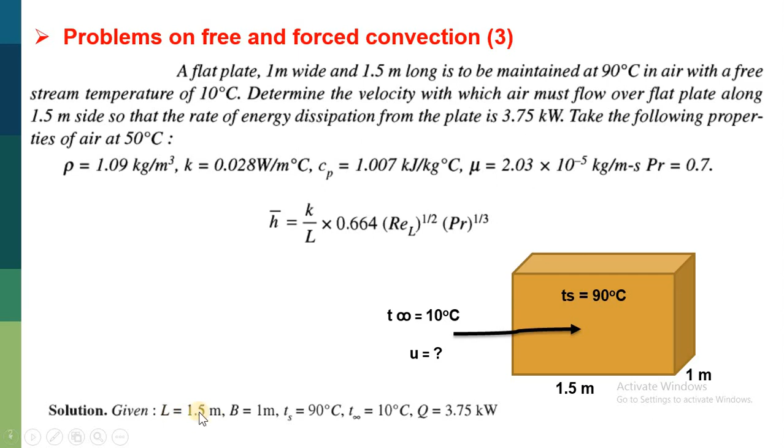And in each problem the relation for H, that is the convective heat transfer coefficient, is given. And once again I repeat, if there is a need to calculate the value of U, or if the value of U is given, the problem definitely belongs to forced convection, or if in this relation the Reynolds number is given, it means the problem directly belongs to forced convection. I have taken this data from the problem. Then let's solve the problem.

We have to calculate the free stream velocity. We know that according to Newton's law of cooling, Q is equal to HA delta T. So from this we can calculate the value of U. Before we begin, we calculate H, the convective heat transfer coefficient, and for this the relation is given in terms of K divided by L, Reynolds number and Prandtl number. K is directly taken from the table, L, the length, is 1.5, and the Prandtl number is given as 0.7.

And we know the formula for Reynolds number: when mu is given the formula is different, and when nu is given the formula is different. Here mu, the viscosity, is given, so we have to use the formula rho L u upon mu; if nu, the kinematic viscosity, is given, the formula will be L u upon nu. Keep this in mind. From this we can calculate the value of H, but here U is unknown. So the value of H becomes 3.123 into root U. Since U is unknown, we cannot determine the exact value of H.

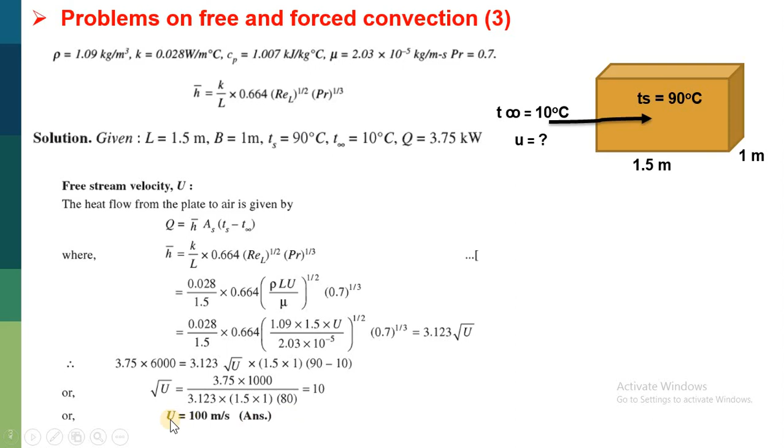But in this problem Q is given, the area A is given as 1.5 into 1, the surface temperature is given, and the infinity temperature, that is the free stream temperature, is given. By this relation you can calculate the value of U as 100 meters per second. This is the first problem where we have calculated the free stream velocity. Then we will go to the next problem.

A hot plate of 1 meter by 0.5 meter at 130 degrees centigrade is kept vertically in still air at 20 degrees centigrade. So the dimensions of the plate are given, and 130 degrees is the surface temperature of the plate. Here Tp is given, or we can write Ts, and the atmospheric temperature Ta is given, so you can take T infinity as 20 degrees centigrade. We have to calculate the heat transfer coefficient H and the initial rate of cooling. In this problem the initial velocity of air is not given, meaning u is not important. So in this case the problem belongs to free convection, keep in mind.

Also you see here, assume the 0.5 meter side is vertical and that the heat transfer coefficient calculated above remains constant, and convection takes place from both sides of the plate. So in this problem also keep in mind heat transfer is taking place from both sides. And in this equation you can see the Nusselt number is calculated from Gr and Pr. Pr means Prandtl number, Gr means Grashof number. Keep in mind, whenever there is a Grashof number, the problem directly belongs to free convection.

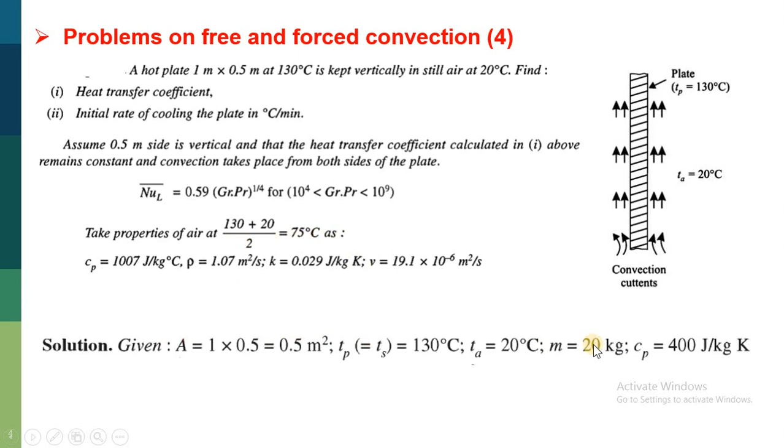Then properties of the air are taken in similar fashion. 130 degrees, the temperature of the plate, plus 20 degrees, the free stream temperature, divided by 2 gives 75 degrees centigrade. If this data is not given in the examination, you have to use the table and list down the properties of air at 75 degrees centigrade, and this data is directly given in the problem. So let's solve the problem.

So first of all we have to calculate the Prandtl number. If you have the value of Prandtl number directly given, then it is okay. If it is not given, we have to calculate it by mu Cp upon K. Then we have to know the formula of Grashof's number: L cube g beta into bracket Ts minus T infinity divided by nu square. Nu is the kinematic viscosity, and putting these values you will get the value of Grashof's number.

Then we have to take the product of Grashof's number into Prandtl number and put this product into the Nusselt number relation, so we will get the value of Nusselt number. And finally you know that Nusselt number is equal to HL upon K, and from this formula you can calculate the value of H, that is 5.66 watts per meter square degree centigrade.

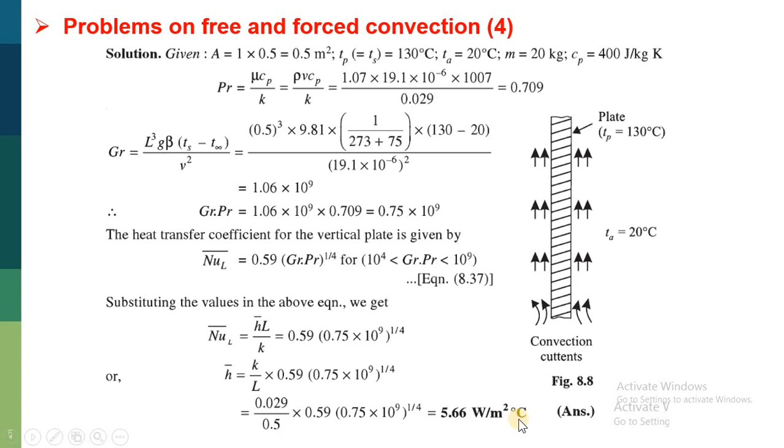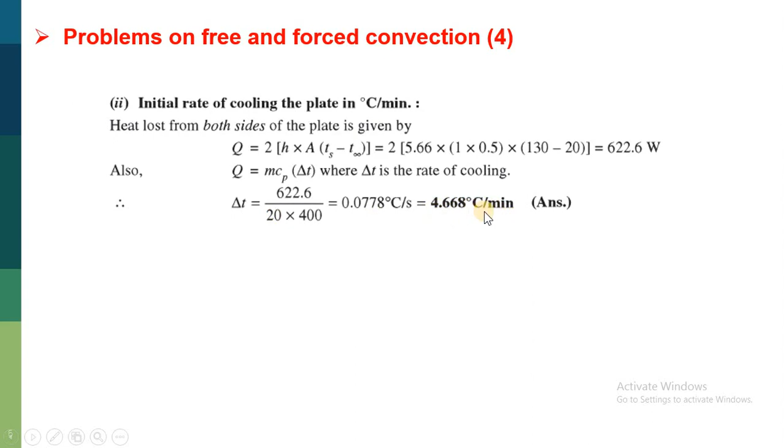Further we have to calculate the initial rate of cooling. As I told you, initial rate of cooling means delta T, and in this problem heat transfer is taking place from both the sides, so Q is equal to 2 into HA delta T. Just now we have calculated the value of H. A is the surface area of the plate, and m is directly given in the problem. So from this equation we can calculate delta T, that is 4.668 degree centigrade per minute. It is a rate of cooling, so we have to calculate it in terms of degree centigrade per minute.

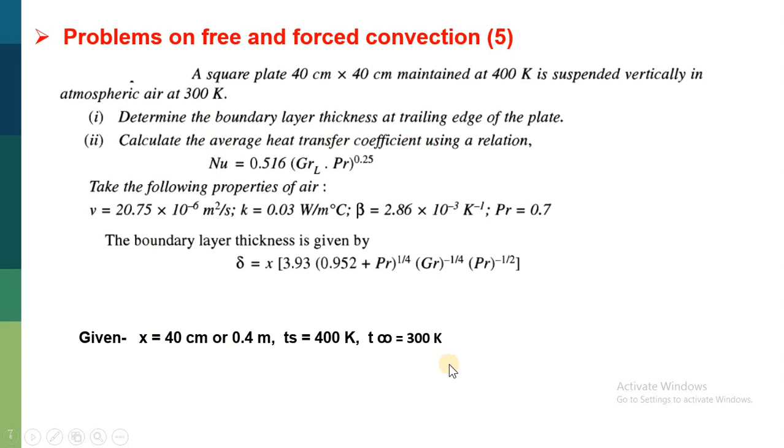The boundary layer thickness is given in terms of x. X is the length of the plate, that is 40 centimeter, or 400 millimeter, or 0.4 meter. And here we have Prandtl number and Grashof's number. So to calculate this delta we have to calculate the Prandtl number as well as Grashof's number, and by using these two numbers we can calculate the Nusselt number and the other required things. So let's solve the problem. To calculate the boundary layer thickness we have this relationship with Prandtl number and Grashof's number.

We know the formula of Grashof's number, x cube. Sometimes we use L as the length, so you can take either L or X, no problem. So x cube g beta delta T divided by nu square, the kinematic viscosity. Put all these values, already taken in the given data. The Prandtl number is already given in the problem, that is 0.7. So we know the Grashof's number and the Prandtl number; put the values in the thickness relation and you will get 0.0149 meters. You can convert into millimeters, but mostly put your answer in meters as the SI unit.

The second question is the average heat transfer coefficient H. If you have the Grashof's and Prandtl numbers, we can calculate the Nusselt number. This relation is already given in the problem. Then we know that Nusselt number is equal to HL upon K, and we have already calculated Grashof's number and we know the Prandtl number. Then by putting these in, we can calculate the convective heat transfer coefficient as 5.058 watts per meter square degree centigrade. So in this chapter we have to practice more problems for better understanding.